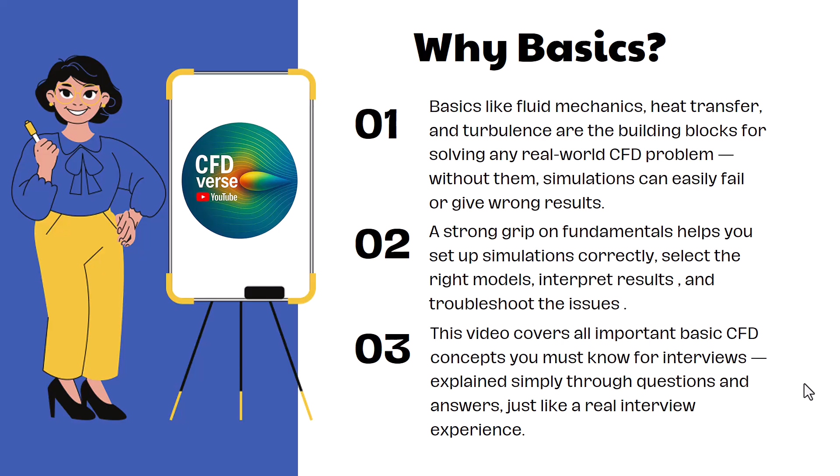The first question is, what is the difference between laminar and turbulent flow? Laminar flow is a fluid motion where the fluid particles move smoothly in parallel layers. There won't be any disruption between these layers of the fluid. On the other hand, turbulent flow is very chaotic. Fluid particles move in very random directions and they form eddies.

In engineering, laminar flows are much less common compared to turbulent flows. In general, all the flows you will see in real life scenarios will be turbulent flows. These flows are determined on the basis of the Reynolds number.

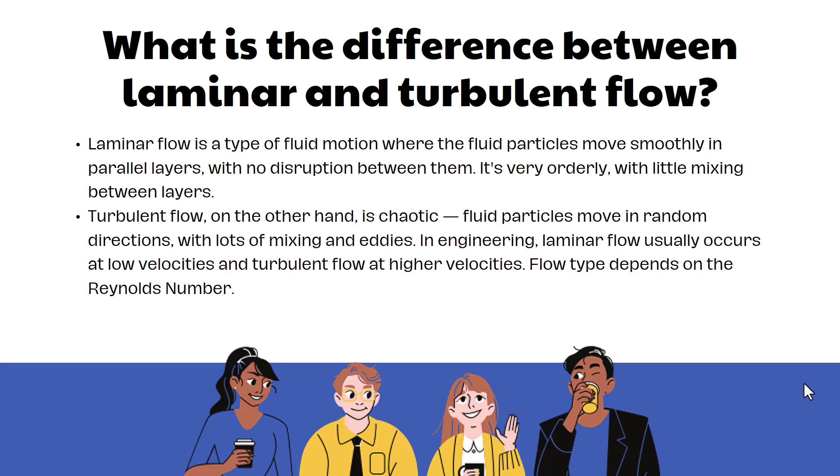So the next question, obviously, is what is the Reynolds number? The Reynolds number, first of all, is a dimensionless quantity which predicts the flow regime. It tells you whether your flow is laminar or turbulent. When your Reynolds number is less than 2000, it means that viscous forces are dominating and hence it will be a laminar flow.

When the Reynolds number is between 2000 and 4000, it's the transition region. If the Reynolds number is higher than 4000, then you have the turbulent zone, which means that the inertial forces are dominating the fluid flow and hence the flow will be turbulent.

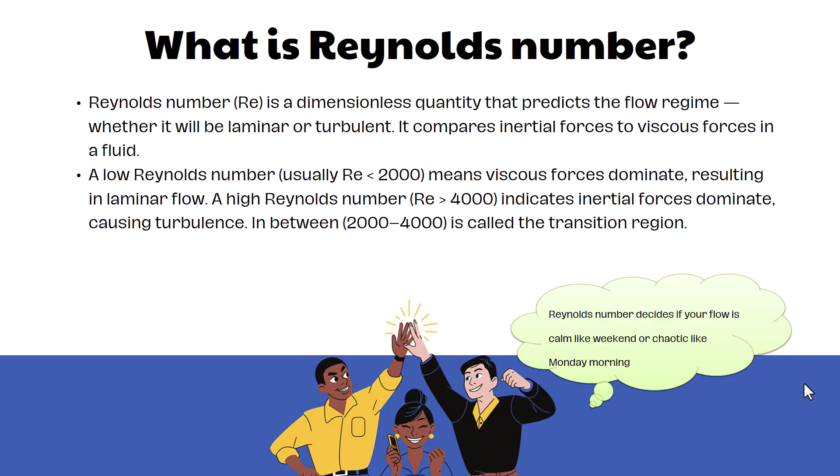The next question is, what is the Nusselt number? The Nusselt number is the ratio of convective to conductive heat transfer across a boundary. If you have a Nusselt number of 1, it means pure conduction is happening, and when the Nusselt number is higher, you can conclude that convection is dominating. It is crucial for designing heat exchangers, cooling systems, etc.

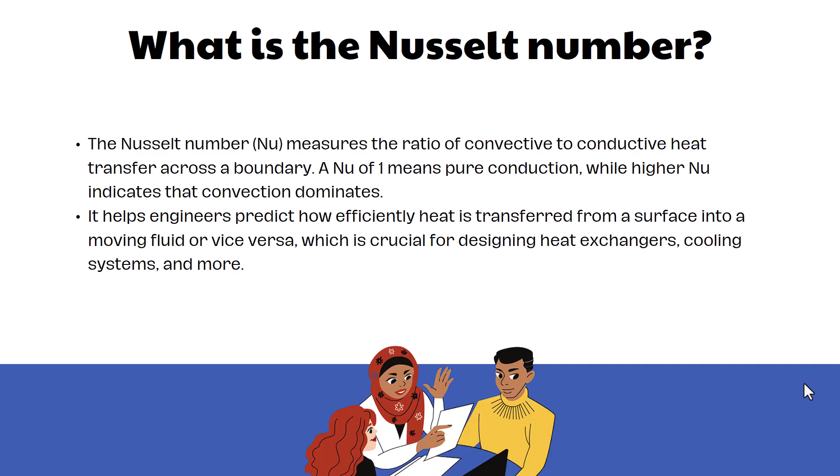The next question is, what are the modes of heat transfer? We all know there are three modes of heat transfer: conduction, convection and radiation. Conduction happens when heat flows from solid to solid; whenever there is a temperature difference, heat exchange will happen, which is conduction. Convection is heat transfer by the physical movement of fluids.

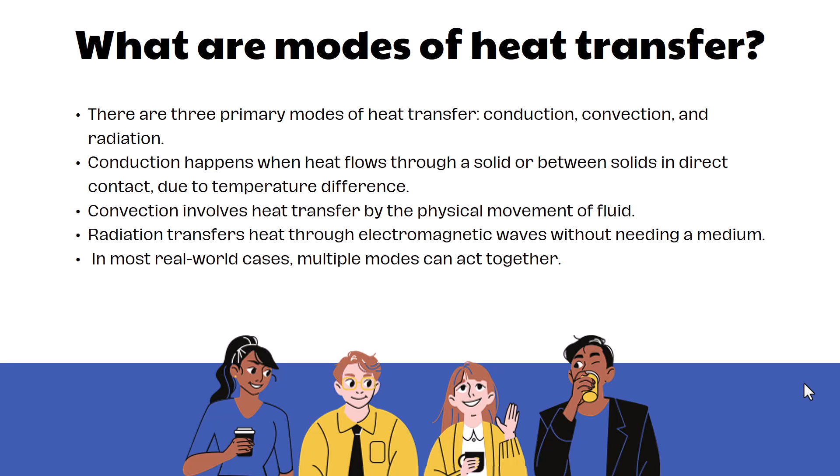So any type of air movement around solids or heat exchange between fluids is called convection. Radiation is the transfer of heat through electromagnetic waves, so radiation does not need any medium to transfer heat. In real world scenarios, multiple modes can act together: conduction and convection together, or all three modes together.

So what is the difference between conduction, convection and radiation? Conduction is heat transfer through direct contact. For example, if a metal rod is heated at one end, the other end of the rod will be heated after some time. This is called conduction.

For convection, an example is when you feel warm air from a heater or cold air from your AC. The third example is radiation, which is sunlight warming your face and body whenever you are outside. It's radiation because the sunlight travels from space to the earth without any medium.

Why are these three modes important to know? Because whenever you solve any CFD problem, you need to know how boundary conditions should be applied. If you don't know how heat is transferred in the real life scenario, whether it is conduction, convection or radiation, you might set up the wrong boundary conditions and get wrong results. Okay.

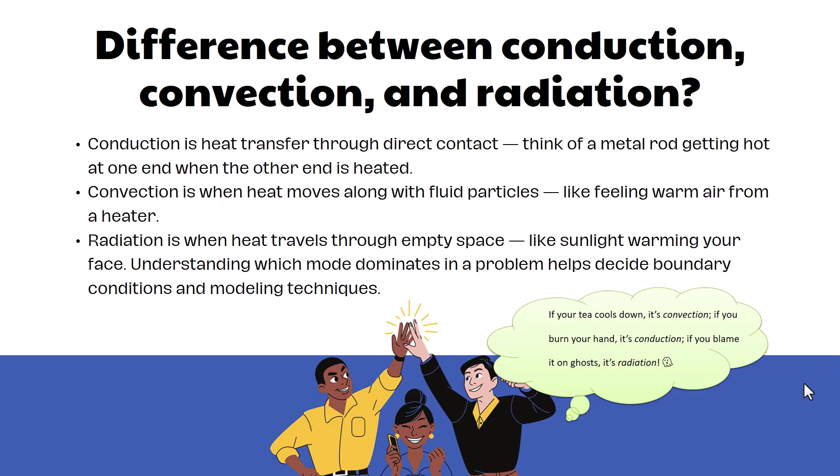Next question is, what is convective heat transfer coefficient? So convective heat transfer coefficient, which is generally given by the letter H, quantifies how the heat moves between a solid surface and a fluid in motion. Suppose that you have any heating solid body kept inside water or air, and the air or water is moving alongside that body, then it is absorbing the heat from that body and getting it transferred through the air or water. This phenomenon can be explained by the convective heat transfer coefficient.

And what does the convective heat transfer coefficient depend on? It depends on the viscosity of the fluid which is carrying the heat and the thermal conductivity. It will also depend on the flow velocity and the geometry, because the more your surface, the more the heat transfer, and all those factors will come in. Okay.

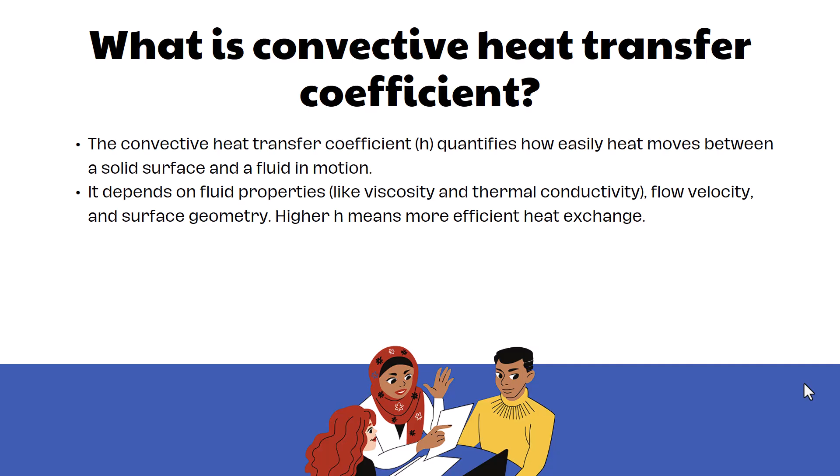The next question, which is very important for any CFD engineer, is what is boundary layer? Boundary layer is the very thin region which is adjacent to a solid surface. Let's say that air is flowing over a flat plate. In a very thin section of air which is very close to that surface, the boundary layers will be generated. At the surface, the air velocity will be 0.

At the exact surface the air velocity is 0, but as you move away from that surface, your velocity will gradually increase. The transition region where this gradual increase of velocity happens is the boundary layer zone. After this region, the free stream region comes up where the velocity will be constant. Within this layer there are viscous forces acting upon the fluid motion.

The behavior of this boundary layer should be captured in order to study our fluid flow motion. These boundary layers affect the drag, heat transfer and the flow separation phenomena. Okay.

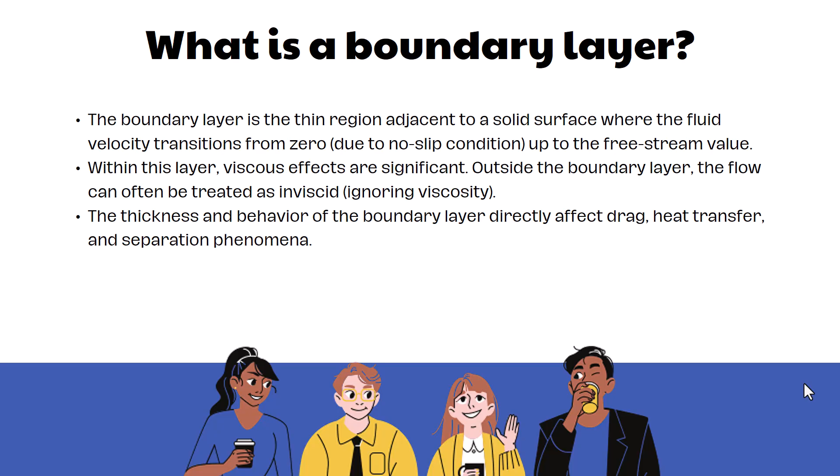Then the next question is, why is capturing the boundary layer important? Whenever the boundary layer is in place, it will control some of the main fluid behaviors, which are skin friction, drag, heat transfer rate and flow separation. If you do not resolve the boundary layers, or if you wrongly create the boundary layers, then your drag coefficients, your heat transfer and flow separation

will be wrong. For example, if you are performing a CFD of cooling of some body, and your boundary layers are wrong and not capturing your physical phenomena correctly, then your heat exchange will be wrong, and as your heat exchange is wrong, your CFD will be wrong. Hence it's very important to rightly capture the boundary layers.

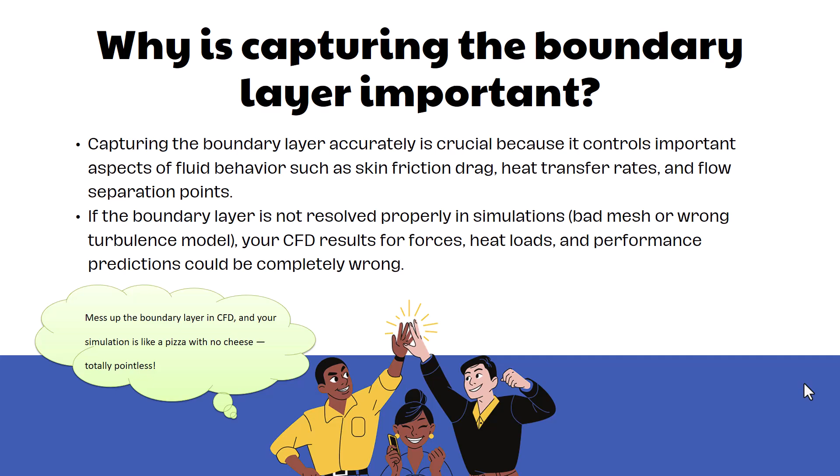Next question is, what is Y plus and why is it important? Y plus is a concept which is related to the boundary layer. I will tell you how. Y plus is a non-dimensional number. It represents the distance of the first computational mesh point from the wall in wall units. Whenever you create a mesh, you will generate boundary layers close to the wall body. When you create those boundary layers, the distance of that first mesh cell from the wall

is called y plus. Whenever you want to resolve a boundary layer, you need to have a very low y plus. The explanation is that if you have a very low y plus, you will directly resolve the viscous sublayer. Whenever your y plus is high, you have to use wall functions properly. Wall functions which we use generally are with k epsilon, k omega, etc.

If you don't have the y plus correct, then you will skip that transition zone where the fluid is resisting against the wall. If you wrongly predict that, then again all the parameters will go wrong. Hence your mesh should be fine near the wall such that it resolves the boundary layers properly.

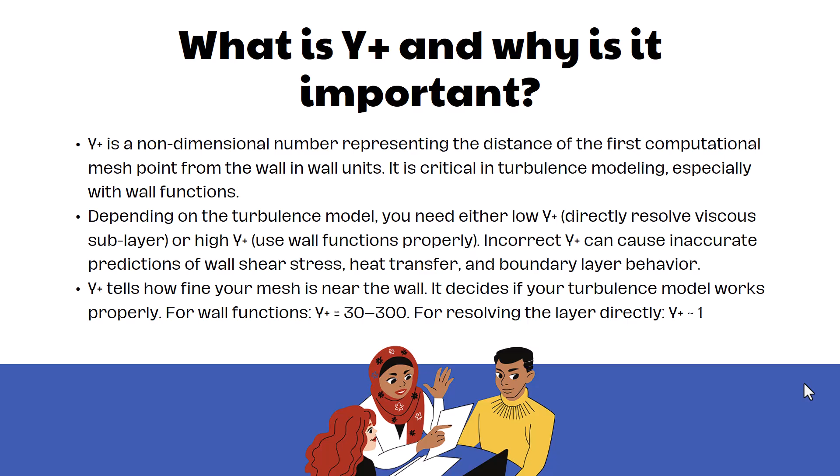Generally for wall functions, like k epsilon, k omega and so on, the recommended y plus is 30 to 300, and if you want to accurately predict the boundary layers, then it should be close to 10. But if you want to resolve the boundary layers directly, then your y plus should be 1. There are many online calculators which you can use to calculate y plus.

Next question is, what is wall shear stress and why is it important? Wall shear stress is the tangential force per unit area exerted by the fluid on the wall. Whenever there is a fluid flow over a wall or surface, due to the viscosity of that fluid, there will be a force applied on the walls. This force is called wall shear stress.

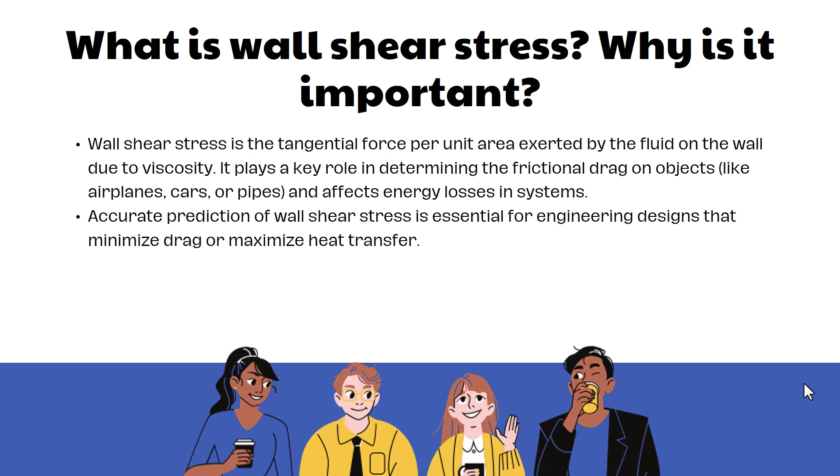This force plays a key role in determining the frictional drag on objects like airplanes, cars or pipes, and it can also cause energy losses. Accurate prediction of wall shear stress is essential whenever we want to design a system where we want to minimize the drag or maximize the heat transfer.